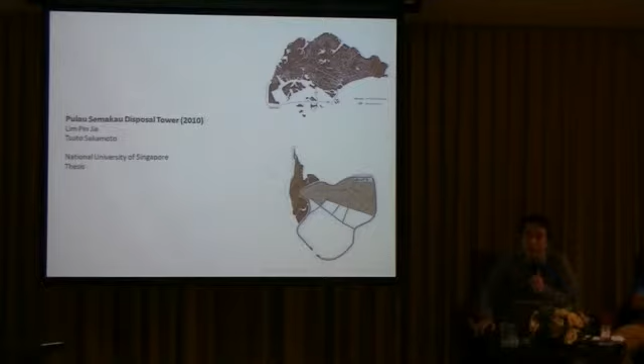And then this island is like this. Well, there are some mangroves, there are some natures that still remain. But because of the ash, actually this island is not so healthy.

This is a kind of chronological projection, history and projection. In the 1970s this Semakau was designated as a disposal site, and then in the 80s, 90s and 2000s, Singapore was disposing the ash here.

But actually, the government projected this idea of a zero waste condition. That means by 2045 they try to even eliminate the ash by processing all of it, so it becomes nothing. That's the ideal hope of Singapore.

But okay, in this project the students actually try to encourage the process of this zero waste idea, and try to achieve it in the 2030s - 15 years before that, before the government's projection.

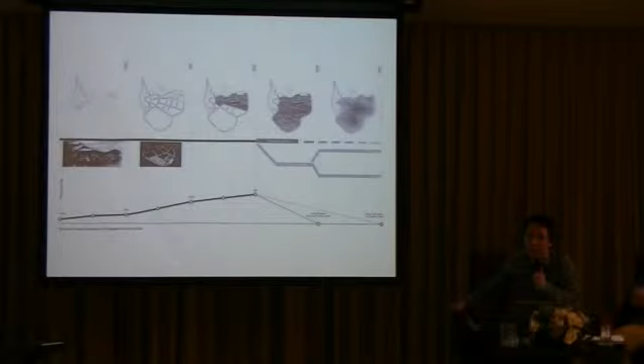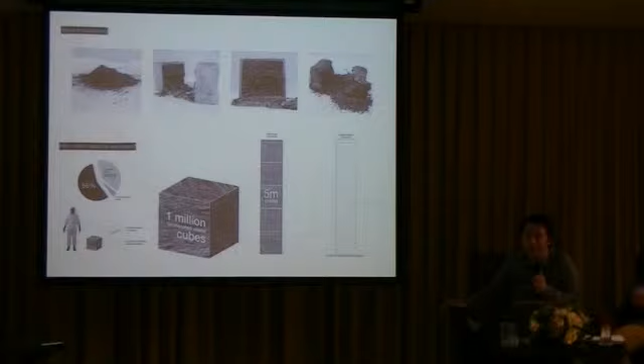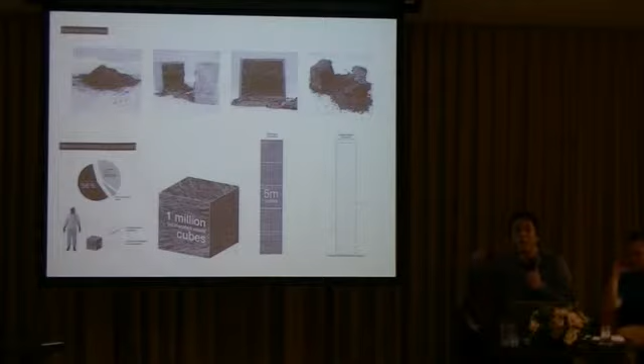Okay, and then students came up with the idea of treating the ash. Right now, unfortunately, this ash cannot be treated and made to disappear - it's still there, and now it's just dumped on the island. But students came up with this idea of making a block made of reinforced concrete. It works as a container, and all the ash is packed into the container, creating cubes.

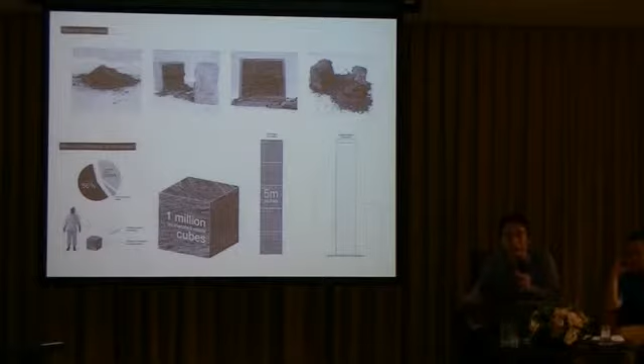Let's say 1 meter by 1 meter by 1 meter cubes. Basically, the students talked about stacking up all the cubes and creating a tower.

Right now, the volume of ash produced in Singapore in a year is equivalent to Raffles City, the skyscraper which is 220 meters high - probably the highest in Singapore. The volume of that building and the volume of ash produced in Singapore are almost equivalent.

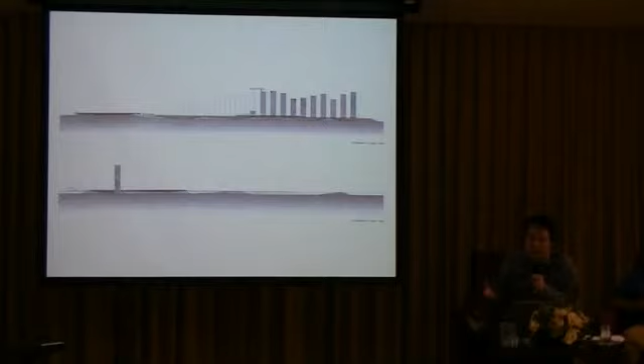So he came up with this idea of making a tower every year, so that people can immediately see their achievement. Every year, if the tower becomes lower, that means the production of garbage and ash will be reduced, which is more ecological, and people are happy. So, to encourage people to reduce waste, he came up with this idea.

So all these towers are actually created. This is the island, and the north part of the island is dedicated for these towers - every year, one next to each other, the tower develops. And because all the ash is contained in the tower, the land right now is not filled yet - this is all ocean, and only dikes are there to prevent the ash from mixing with the seawater.

These fields will be turned into farms, where all these dikes will be planted with mangroves, so that ecotourists will enjoy this space. So that was his idea.

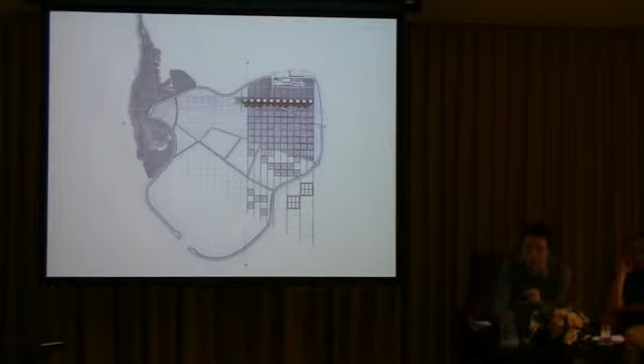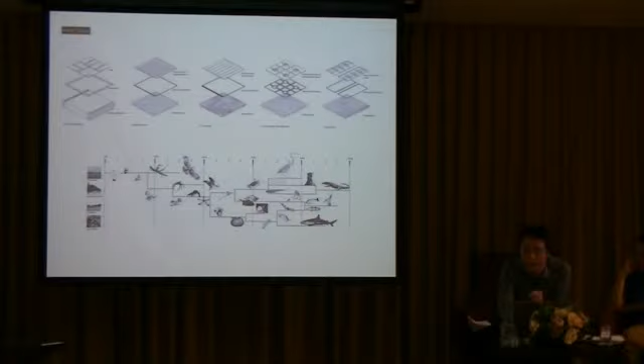Okay, and then this is a kind of perspective. And then this is the kind of projection of ecological development of a certain ecology.

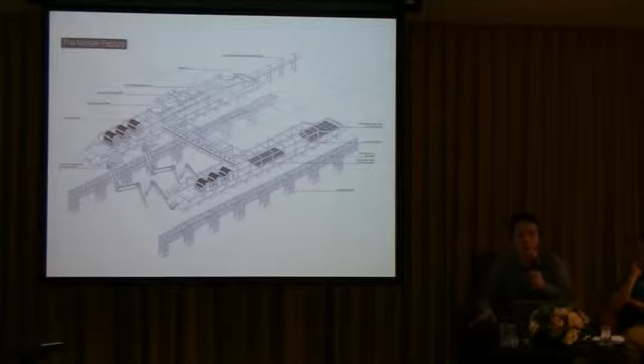Okay, and then this is a big mobile factory. That means once the tower is made, the machine moves to the next one and creates another tower. And then the tower is made of all these ash blocks. So in a sense, this building is not like a post and beam structure, but more like

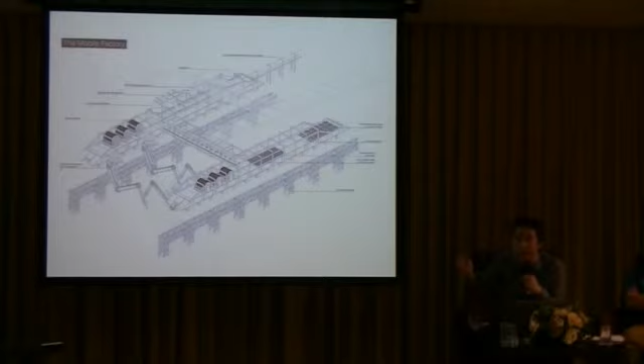an Egyptian pyramid. A pyramid is stacking stone, one on top of the other, right? These towers actually, the ash in the concrete block, is actually stacked. So this is the machine to process all the ash, containing the ash into the concrete blocks.

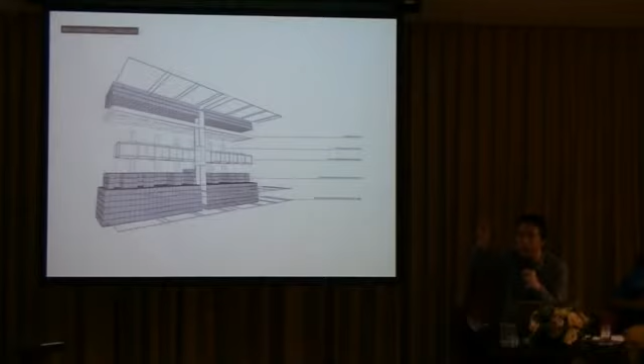And then this is the structural idea. Basically it's stacking each other, and then coming up with constant beams, so that all the weight doesn't hit the bottom. And then this is the process of construction.

So they are dealing with the basement also. They are digging, they have to dig to create the foundation of this tower. But digging means people have to expose themselves to this ash, the old ash, right? So they are always wearing these space suits. It's an airtight suit.

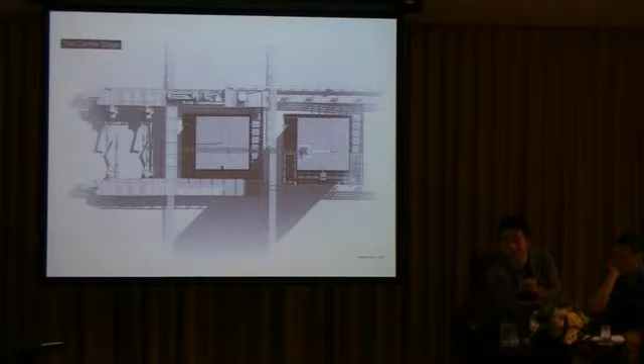And then this is the process plan. The machine actually creates one tower and then moves to another one, and moves to another one. And then this is the process elevation. Okay, so all these technologies created these towers.

And then these towers are now accommodated by people. Probably a 220-meter tower is very suitable for luxurious condominiums. But this building is not like a post and beam structure, like I said. You cannot get space inside of a building. Only you can come up with space at the edge.

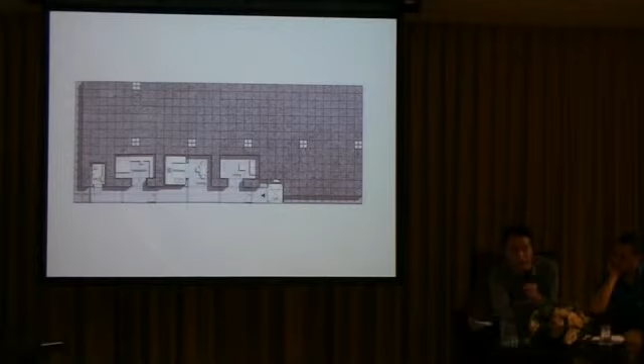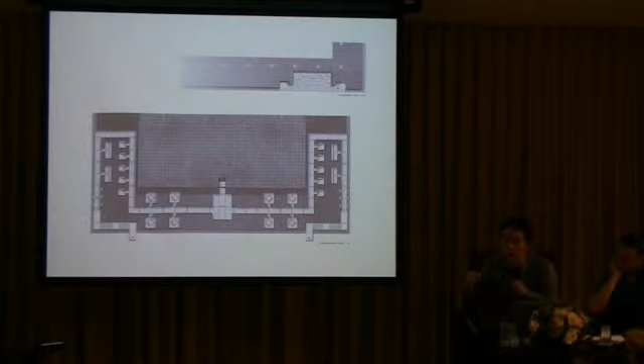It's like ants creating a nest inside the ground. So this is one unit, all exposed, actually facing to the outside. And then this is the ground level that also has all the corridors and the elevator shaft and so on.

But when they do farming, they have to wear space suits, and they may have contact with the dust. So when they come back to the residential unit, they have to go through this air shower, so that they are totally cleaned off when they come into a residential unit.

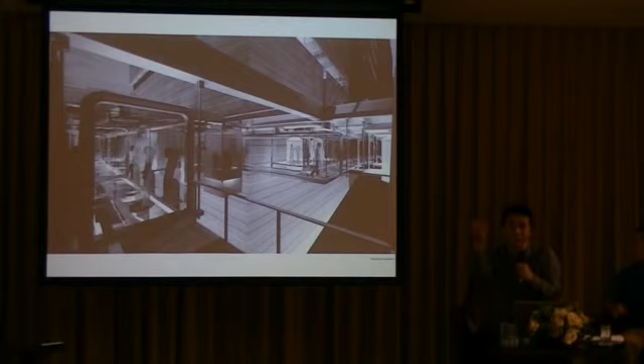So again, all this architecture tries to look for perfection and then refinement in terms of technology. And then all these towers, without any, how can I say, deception, actually come up as a tower. A tower is made of blocks. It's very objective. Nobody has a doubt.

And then the residential is airtight. So everything is proper. But if you look at this, the residents here, is it the ideal life or not? Again, we are put into an undecidable condition. This is almost like an inhuman, post-human condition, where people have to talk to each other within space suits.

Maybe they need a microphone and an interphone within the helmet. And then they have to always worry about this. They constantly have this anxiety. So in a sense, again, this is a utopic idea. But when we really explore it in a realistic and objective manner, all these projects come into